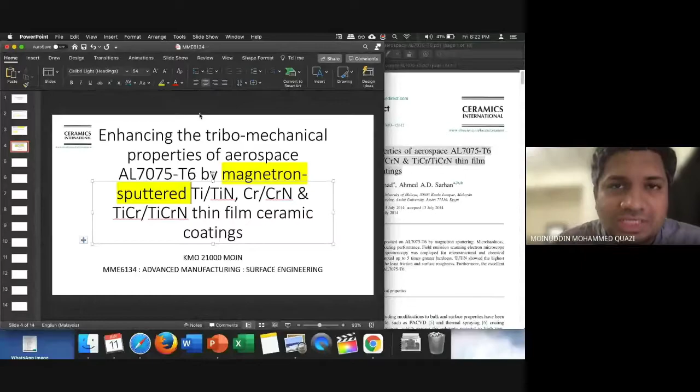Here you can see: enhancing the tribomechanical properties of AA7075 by magnetron sputtering. This is basically a surface coating process. AA7075 is the base material. This is the coating — TiN, CrN, titanium nitride, chromium nitride.

And titanium chromium nitride are basically coatings. So we have base material AA7075, and we have magnetron sputtering, which is the coating technique. I'm going to upload a coating technique presentation or video for you guys also. Then we have types of coatings. So the first thing you do after writing the title is give a brief overview of the coating technique.

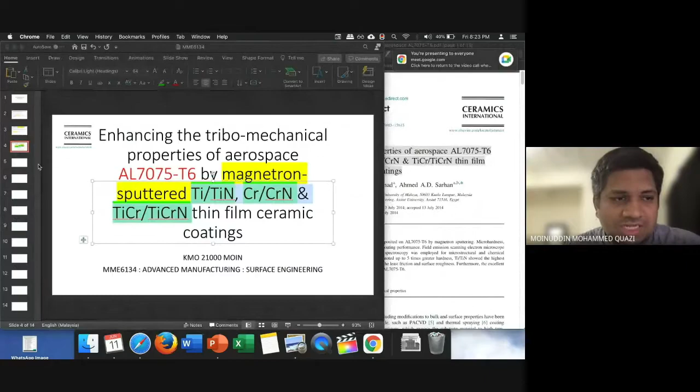So slide number 2 is going to be a brief overview of PVD, which is physical vapor deposition.

This will be your slide number 2. You have to give some process overview — what are the characteristics of the PVD technique. Target material is sputtered onto the substrate. Add some basic process description, and then add a picture of the machine. If you don't have the picture inside the paper, go online, search images, and try to get a PVD schematic, which will give you an overview.

This looks like a very nice schematic. So copy this image, paste it here. This is good, and then copy the link or copy the reference, and put it as a figure label. The figure label is very important. This is the reference — what is this all about?

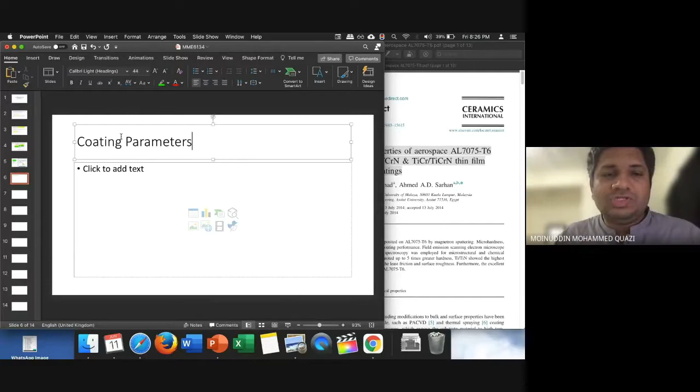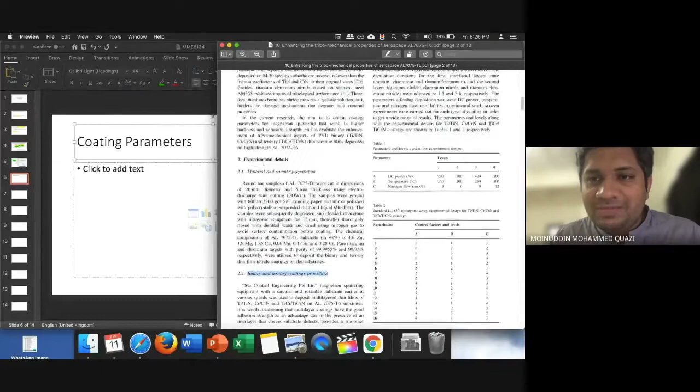Coating parameters — you can go here in the research paper, go to the methodology, and here it has shown the coating procedure and the parameters that they have changed. So these are the parameters they have changed.

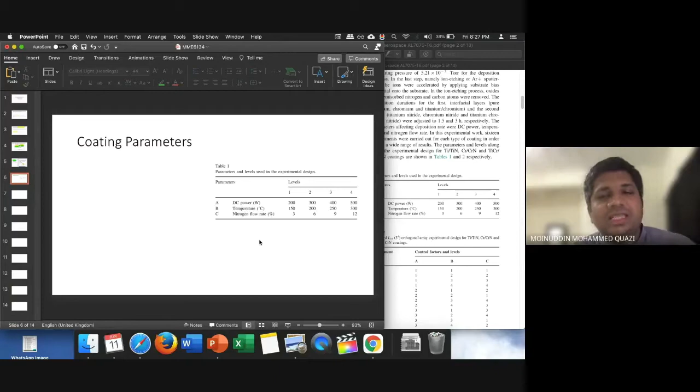The parameters that they have changed are DC power, direct current power, temperature, and nitrogen flow rate. So here you're now telling me these are the parameters for the coating process that they've changed in this research — that's good enough. What are the other parameters? Like the deposition chamber has a parameter of pressure. So use this too.

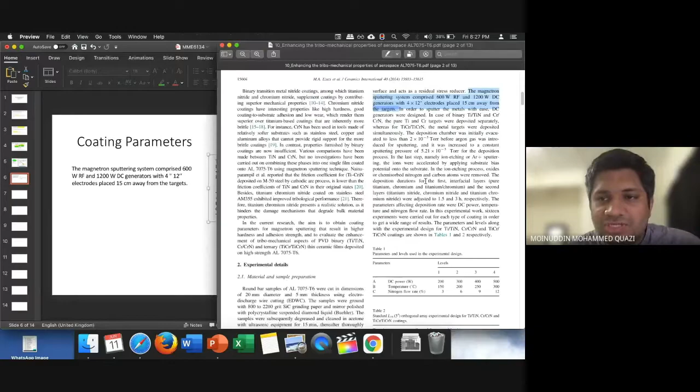Then they've got the power requirement also written, so you can add power requirement as well — add the parameters of this machine. You guys should know which parameters are required for which machine. For example, for anodizing process, I will not use 600 watt of radio frequency power — that's only for the magnetron sputtering machine. Electrodes are used in both anodizing and PVD physical vapor deposition machines. So these are some of the parameters you have to mention.

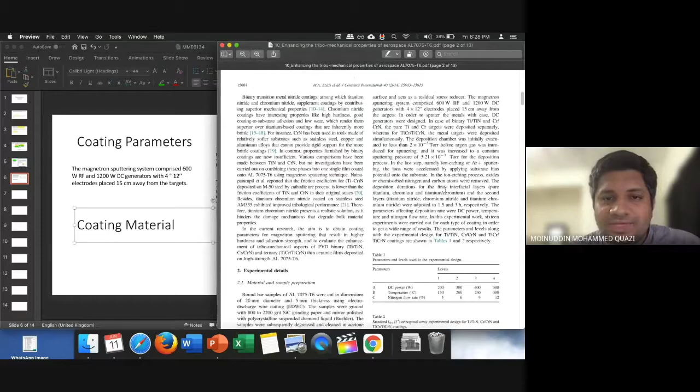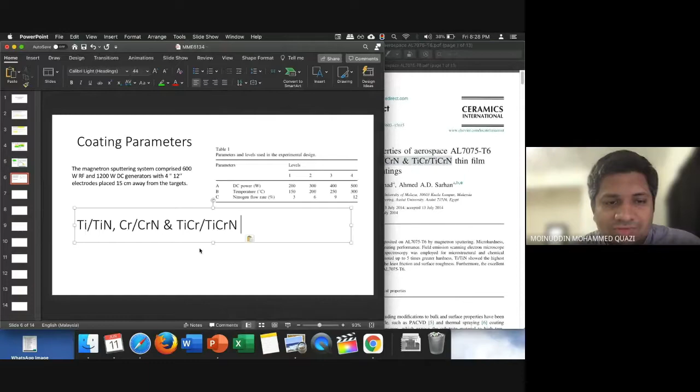After writing the coating parameters, you should write the type of coating or coating material. In my case, I have three types of coatings. Number one they've mentioned is titanium nitride, chromium nitride, and titanium chromium nitride — three different types of material.

If in the paper the coating is the same but the composition is changing, then you have to write the composition here. For example, this one is 30%, this one is 60% graphite added, and this one is 0.01% nanoparticle cerium oxide added. You have to mention, based on the research paper, whether the material type is changing or the composition is changing. In this paper, the type of material is changing, not the composition.

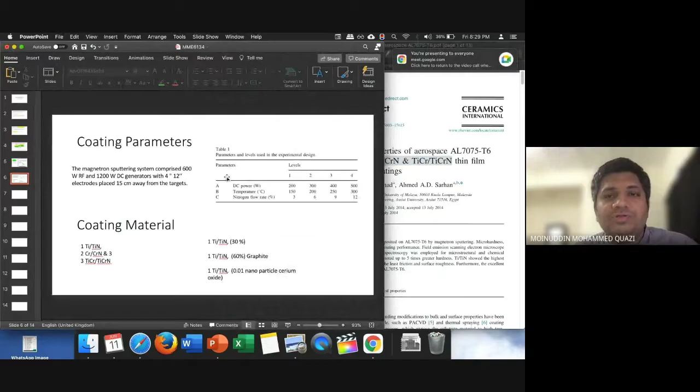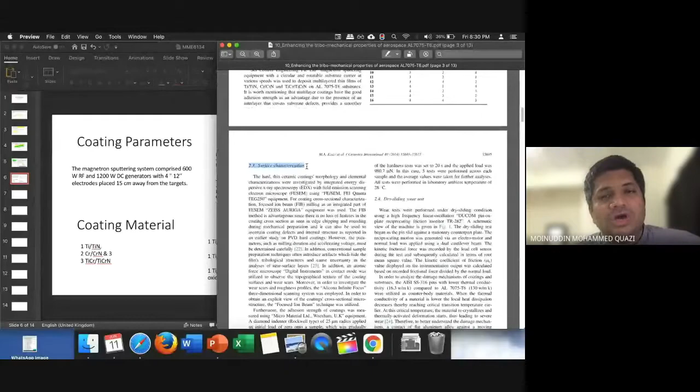So after going through coating parameters and coating materials, now you have to mention the measurement — what properties, what surface properties are they measuring? Here in this paper it's written surface characterization, so you have to write how the surface was characterized. In this you write surface or properties measurement.

Here they have written that they used SEM, scanning electron microscopy, then they have used focus ion beam technology.

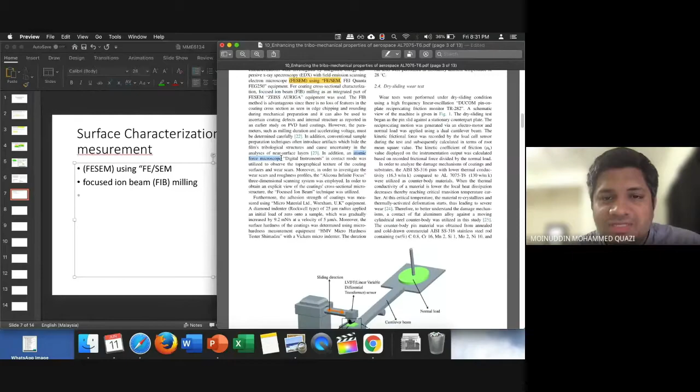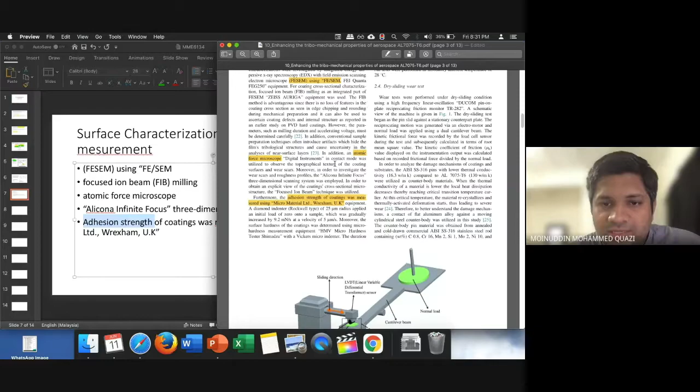Then they have used atomic force microscopy. This is something that you will learn in today's class slides. Then they have used the Alicona 3D scanning system. And then they have used an adhesion strength measurement system, which is something I will maybe upload tomorrow.

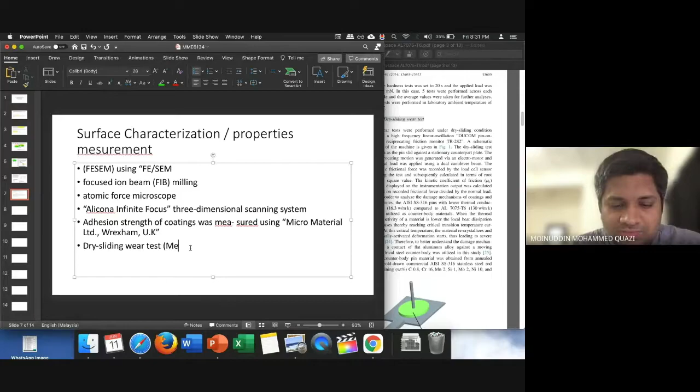And then this is what they have used for surface characterization. They also performed dry sliding wear testing to measure friction and wear. So friction and wear is also a surface property.

There are three main types of surface properties. Number one is surface roughness, surface topography, surface integrity. Number two is friction coefficient and wear. Number three is basically the adhesion or adhesion strength of the coating.

So do remember that we have to cover three properties. Number one is surface topography or roughness.

Number two is tribology, which is the field of science that relates to friction coefficient. And wear is basically a process by which, when two materials move together, the material is removed—some part of it is eroded or removed due to the rubbing action. So this is called wear.

So adhesion strength means that if I put a coating on my substrate, then how difficult it is to peel it off, or to remove it away from the substrate, or to scratch it away from the substrate. The better the adhesion between the coating and the substrate, the better the coating.

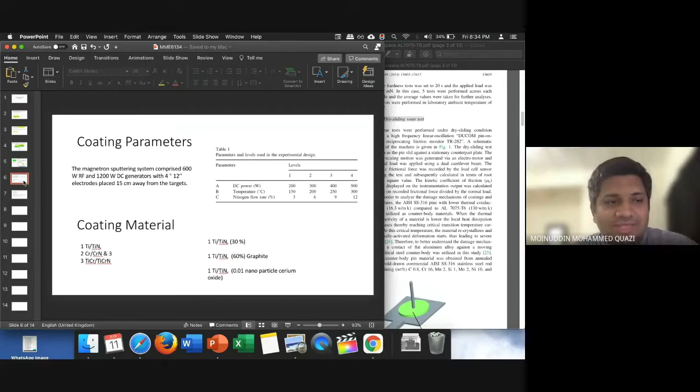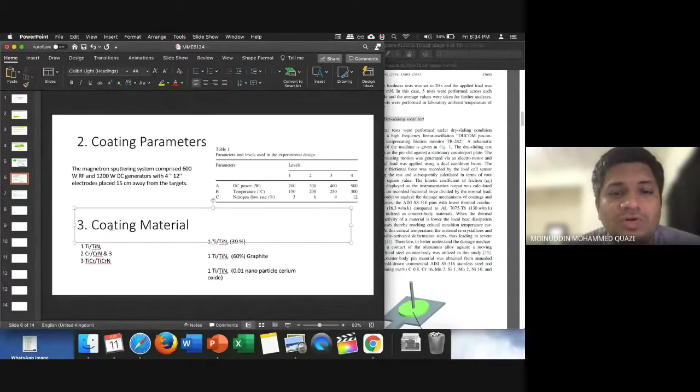So these are some of the three things you have to look for in your papers. Number one is the title slide, number two is the process brief description, number three is the coating parameters used, and then which coating materials are used, and then what properties and what kind of machines or measurement techniques have been used.

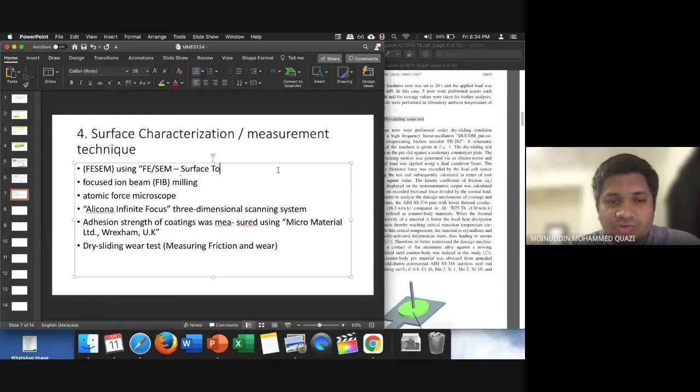So FESEM has been used to see surface topography—this is something you should know, or can learn today. Then focused ion beam milling is used to see the surface cross section.

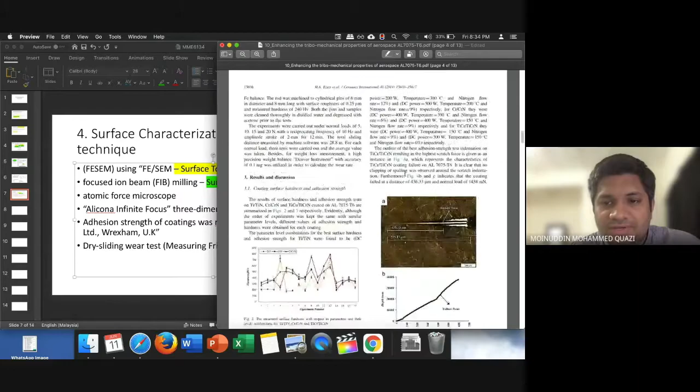So if you go here in this paper and look at this image, this is a focused ion beam milled image. What happened here is that I have a coating deposited on a substrate. Using focused ion milling, I have removed some part of the coating using ions, and now I can see the depth part of the coating shown in this figure.

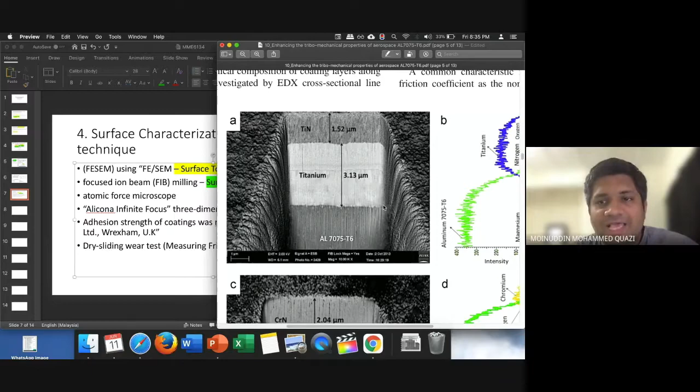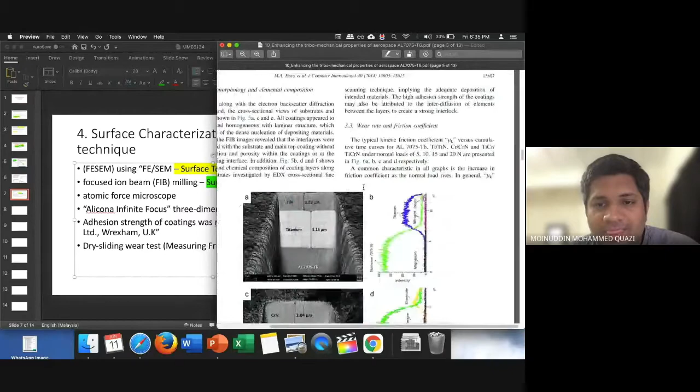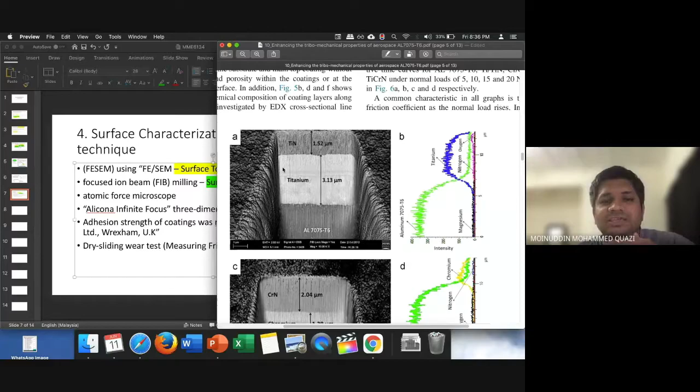Here you can see we have the substrate, which is aluminum 7075, as shown in the title. Then we have a titanium nitride coating. If you look at the paper, in figure A we have the Al7075 substrate, then one coating of titanium, and then another coating of titanium nitride. This is a focused ion beam milling scanning electron microscopy image, and it gives us the surface cross-sectional information.

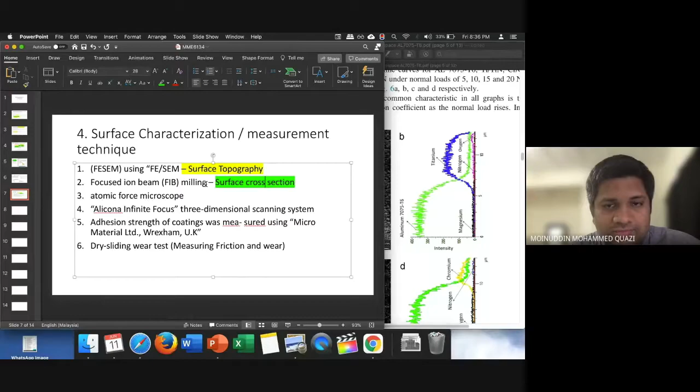Okay, so let's move down to atomic force microscopy. Just search atomic force microscopy.

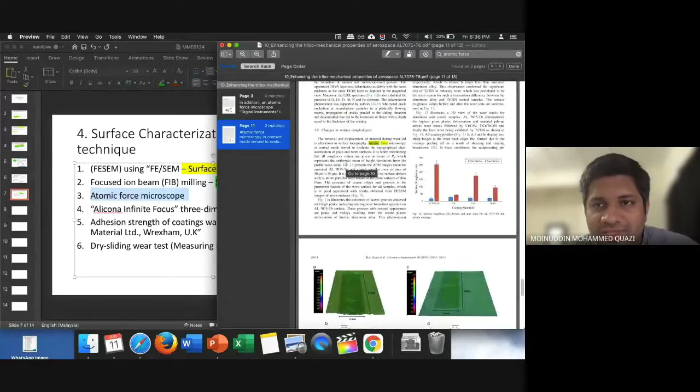And here we go, atomic force microscopy, page 11. So click page 11 here, and you will find atomic force microscopy images.

Atomic force microscopy, as the name suggests, is atom-based microscopy. In this microscopy, you have a coating and a very small 10 nanometer stylus or tip that scans slowly and makes the image you see on the screen. It scans a very small area. In this figure, the area is 30 microns by 30 microns, and you can see the surface texture.

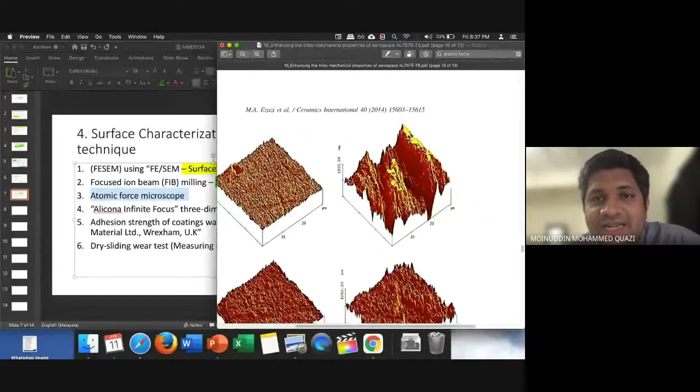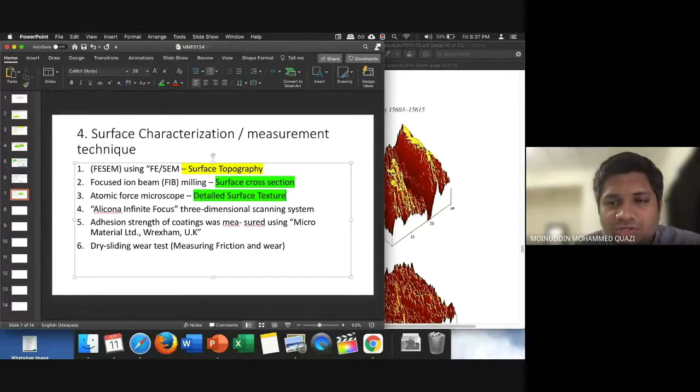With atomic force microscopy, I can see detailed surface texture. You can also see what atomic force microscopy has been used for. In addition, atomic force microscopy in contact mode was used to observe topographical texture, so you can also write this here: to observe topographic texture.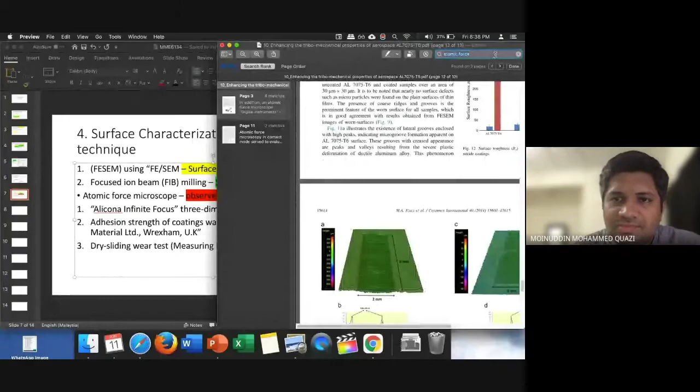So, scanning electron microscopy. What is scanning electron microscopy? Here you can see in one of the images, this is a scanning electron microscopy, I think this is Zeiss, Carl Zeiss SEM. Let me make another one, SEM. So scanning electron microscopy is shown here in this figure, and it is also used to see surface topography and cross section.

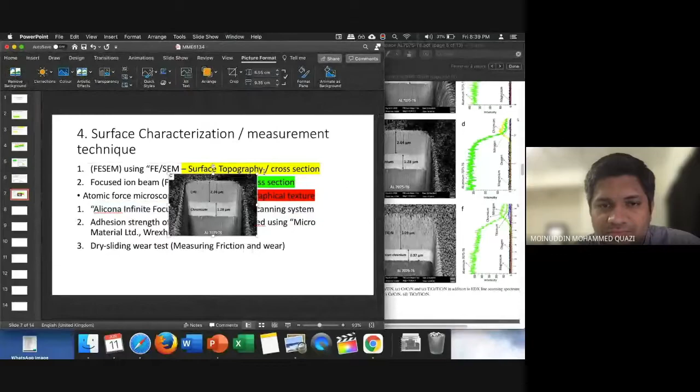Now, what is this three-dimensional scanning system, and what is its function? Let me add scanning electron microscopy here so I know what it is. I'll give this to you guys so it's helpful. Focus ion beam, this is also focus ion beam milling. I think this is focus ion beam milling. Scanning electron microscopy is this one as well.

Right here, this is SEM, this is focus ion beam milling. Next, we move to atomic force microscopy, so this is atomic force microscopy. Then we have a three-dimensional scanning system.

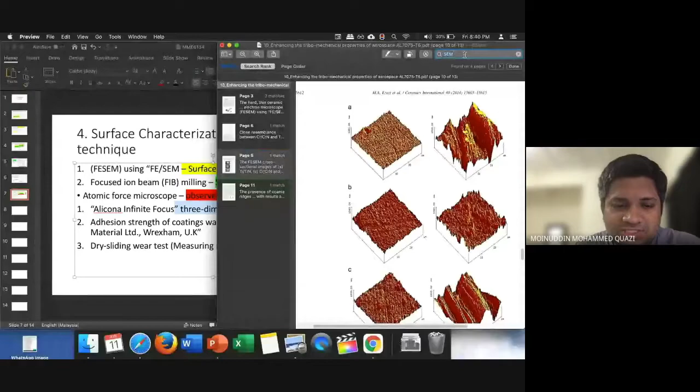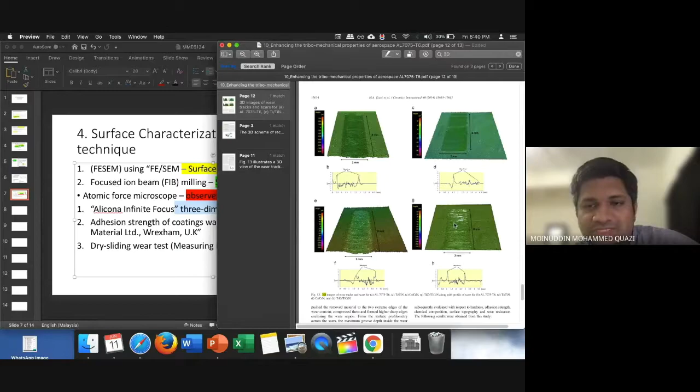Three-dimensional scanning system. Let's search 3D. When I search 3D, you can see 3 or 4 images. This is the image of the substrate, aluminum 7075. This is the image of titanium nitride coating, this is chromium nitride coating, and this is titanium chromium nitride coating. So this is basically an example of a 3D scan image.

Here you can see that a 3D scan has been carried out, and the surface profile or surface measurement has been taken as well. Just copy this so you guys know what a 3D surface scan is.

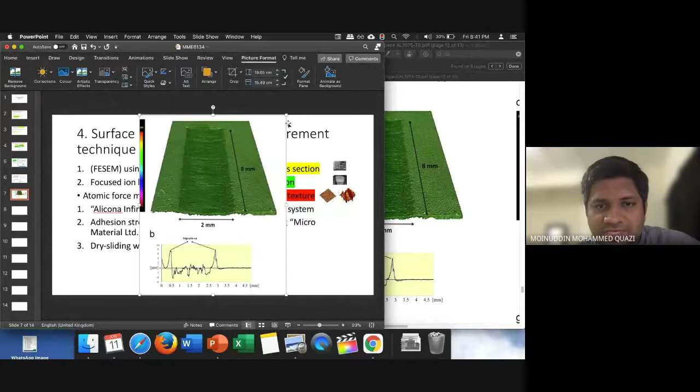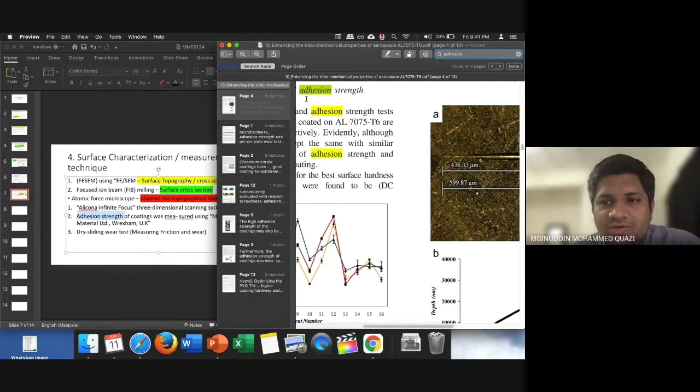Next is adhesion strength. I am going to search adhesion. So when I go to adhesion, I see this image. Adhesion strength, in this adhesion strength image, I have optical microscopy.

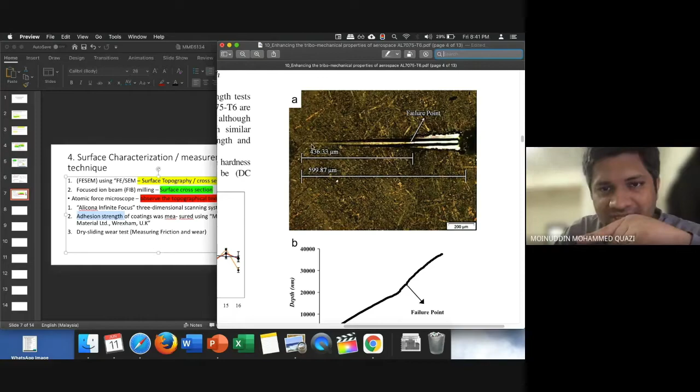What is adhesion strength testing? It is a test where you have the substrate, I put my coating, then a diamond indenter goes and starts scratching very hard, trying to pull the coating out. Here you can see the diamond indenter trying to pull the coating out, scratching until you see the substrate in this portion. So scratch testing is a process in which you scratch the coating and get a value called critical load, the load at which the coating fails.

So this is the scratch testing microscope result. I'm going to put scratch testing here. I'm putting these things so that whenever you guys read your papers, it's easier for you to know and understand what you are looking for.

Somebody came. Nobody's here.

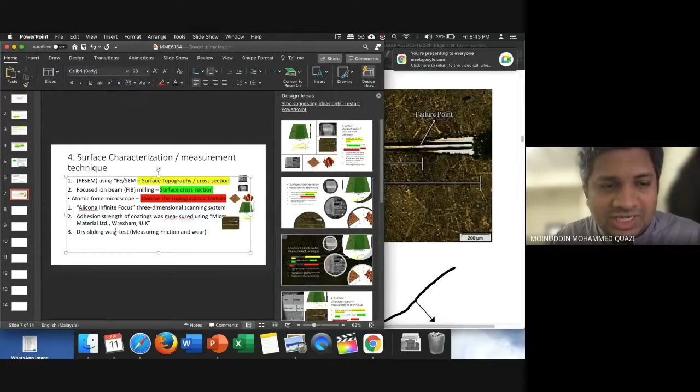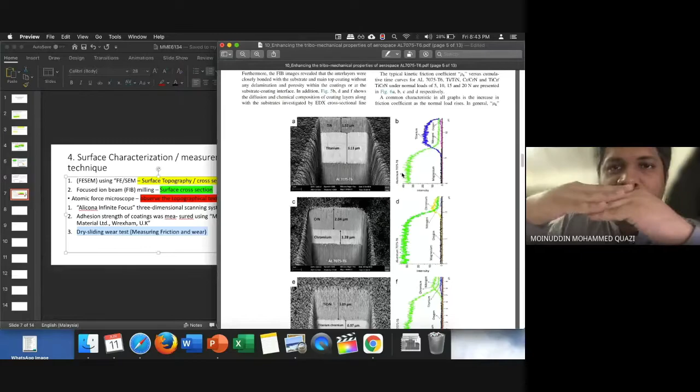So adhesion testing, then the last thing is dry sliding wear test. You search wear testing. Wear testing is a process where I have my sample and I quickly rub the material, scratch and rub it. This way I know how much wear took place, how much material is removed from the coating. For wear testing, they have shown this machine.

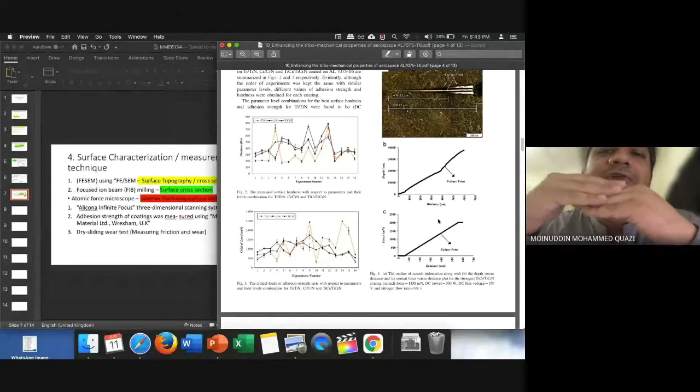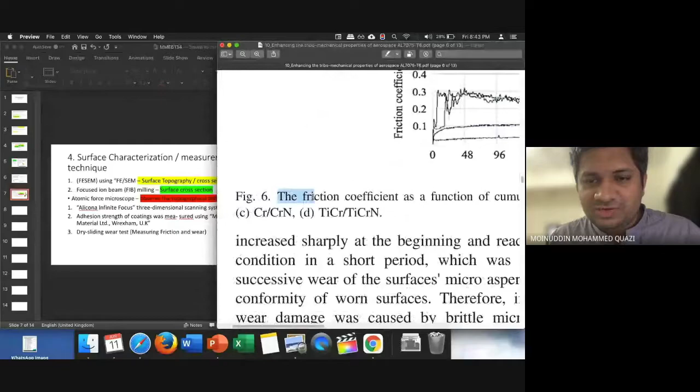So I will put this machine here, or I can put the results of wear testing. In wear testing, you get the value of friction coefficient and amount of wear. So the friction coefficient is here, shown as a function of cumulative sliding distance, for substrate, coating number 1, coating number 2, and coating number 3.

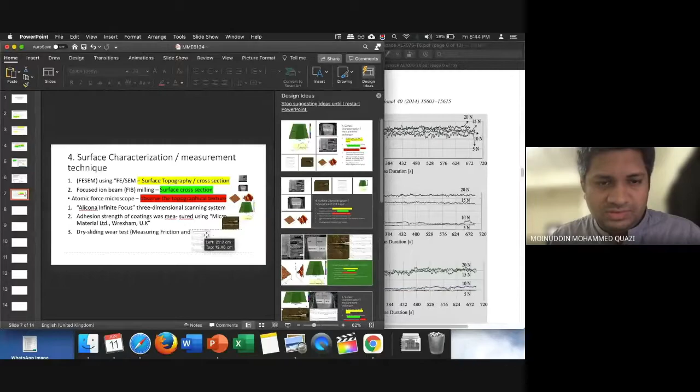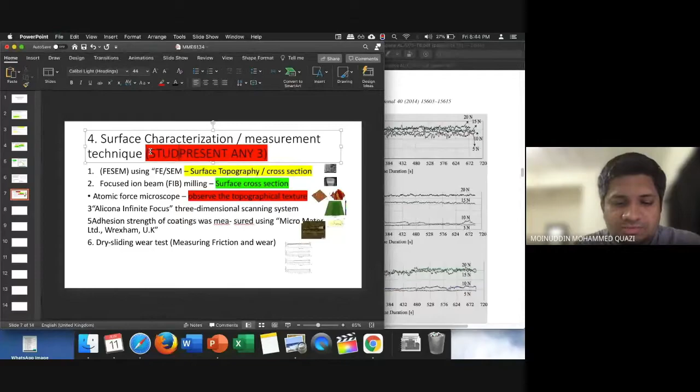So your fourth slide is what you are going to measure, or what has been measured in this paper regarding surface engineering. These are the 6 things which I've highlighted. In all papers you will not get all 6, so I want you guys to present only 3. Present any of them, it's up to you guys what you want to present. Students can present any 3 properties.

So slide number 1, title. Slide number 2, overview. Slide number 3, coating parameters and materials. Slide number 4, what you are measuring. Now that you know what you are measuring, you will write your result, what you have measured. So now it's time for results: slide 1, 2, 3, 4, 5, 6, 7. This is property number 1, property number 2, property number 3. Then you have the end.

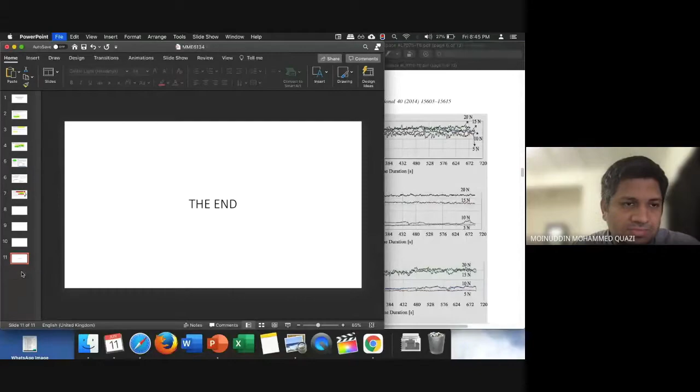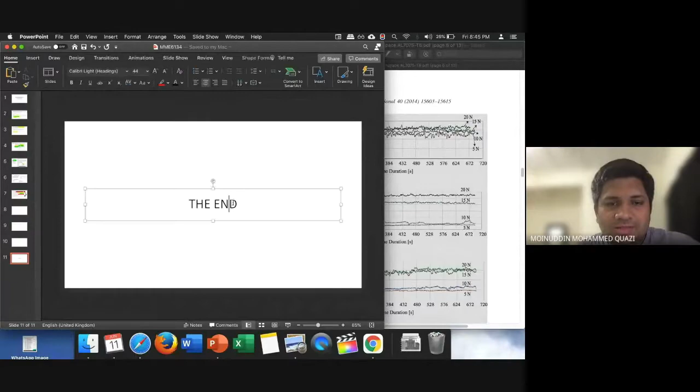So total 1, 2, 3, 4, 5, 6, 7. 7 slides in 10 minutes. Actually, the title slide does not require time. So you have 10 minutes to present, 10 minutes to present 6 slides. 1, 2, 3, 4, 5, 6. So you guys have 6 slides.

In 10 minutes. So the reason for this exercise and for reading this journal exercise is for you guys to first go through my lecture and then correlate what you have learned through the practical that people have done already. That is my objective. And then whatever you observe, whatever you catch from the papers, you catch and then you present to us. In this way, I will be also correcting you guys in the presentation, and then at least you guys will have a good chance to learn from what you have seen. If you read yourself and then you ask something, then you will learn more. If I teach you something based on some narrative, then you will not learn much.

So we have to present 3 properties. In this example, I will present 3 properties. Property number 1 I want to present is surface roughness and texture. So where is this information? This information is here.

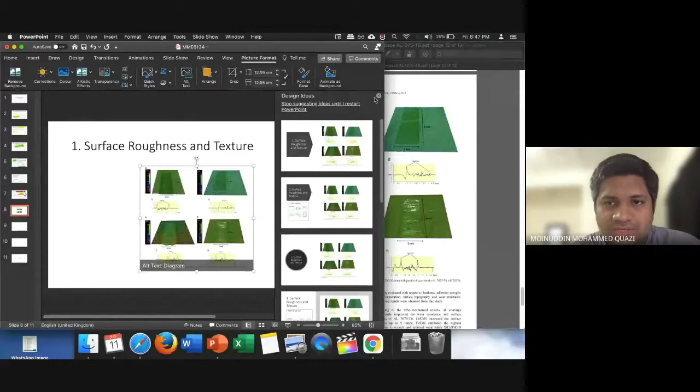So this is the surface roughness. So I will put it here. And this is the surface roughness figure also, base material, coating material, all 3 of them. So I will use that.

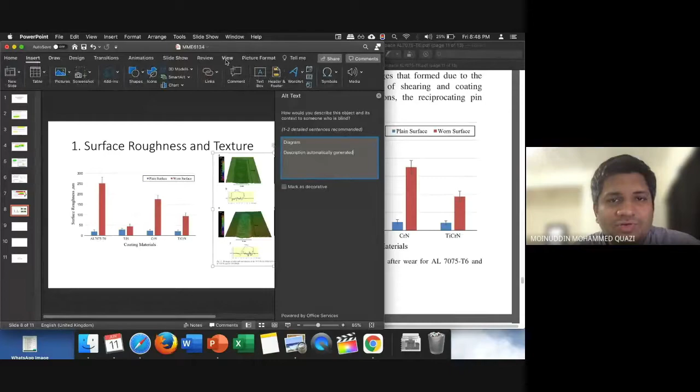So my objective will be to describe these two figures. Just write one or two lines. Also, you can write one or two lines, concluding lines. Write one or two results line.

What happened after we do wear testing? After we do wear testing, because our aluminum has not been coated, so it undergoes a lot of damage. When it undergoes a lot of damage, then the surface roughness increases too much. So that is why the change in surface roughness for aluminum is too high. So this is something that you have to read from the paper and explain about this. So this is property number one, surface roughness.

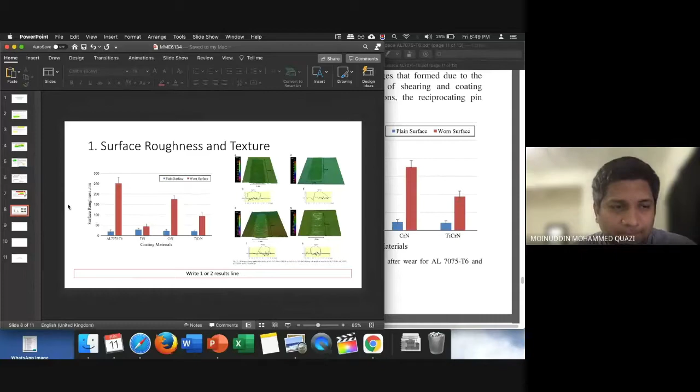Let's move to property number two, adhesion strength. How strong my coating is sticking to the substrate. So I will go and I will add the data of adhesion strength. The adhesion strength data is here.

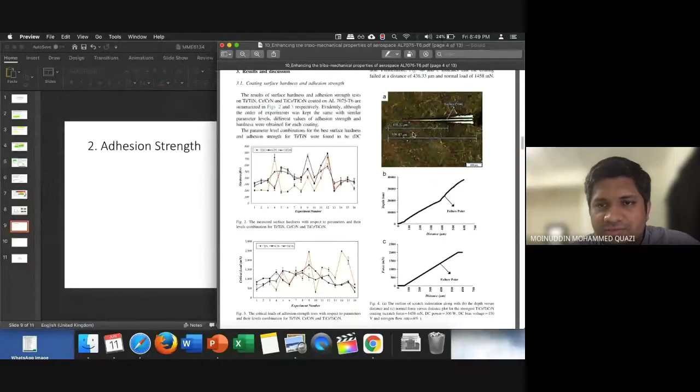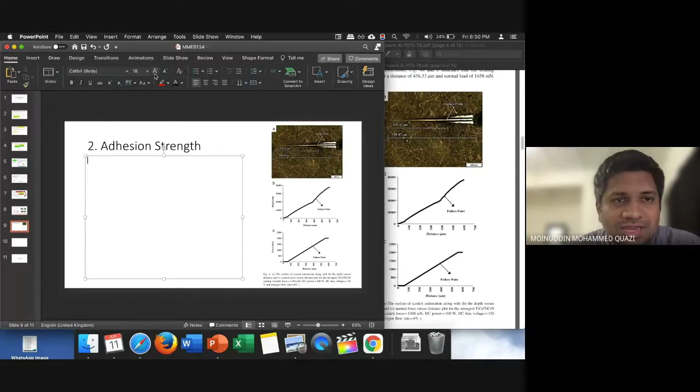I will put it here. Adhesion strength data. So you are going to describe here what do you see or what do you observe from the adhesion strength. So based on the adhesion strength, let me give you a highlight or overview that you are going to see in adhesion strength.

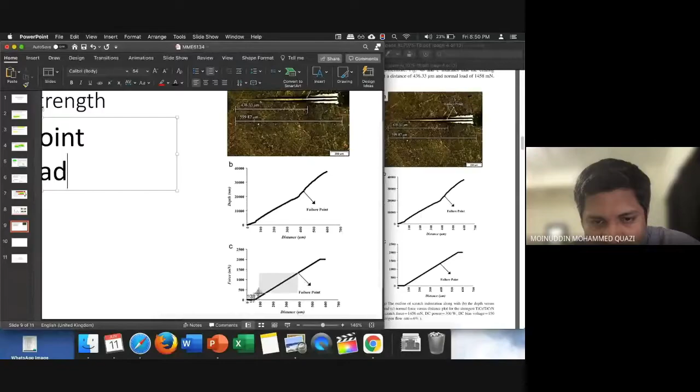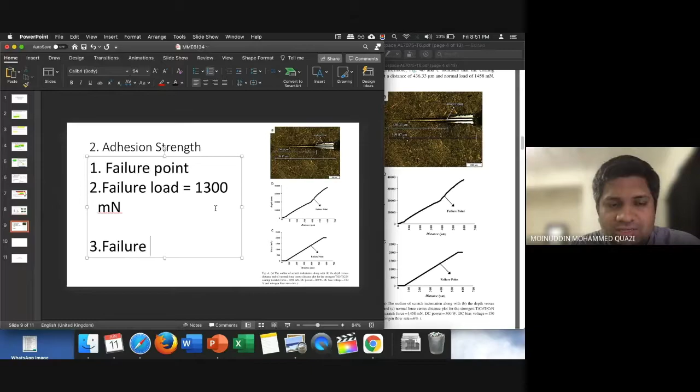Number one, failure point. Number two, failure load. As you can see in the figure, the failure load is about 1300. It should be mentioned also. So failure load was equal to 1300 millinewton.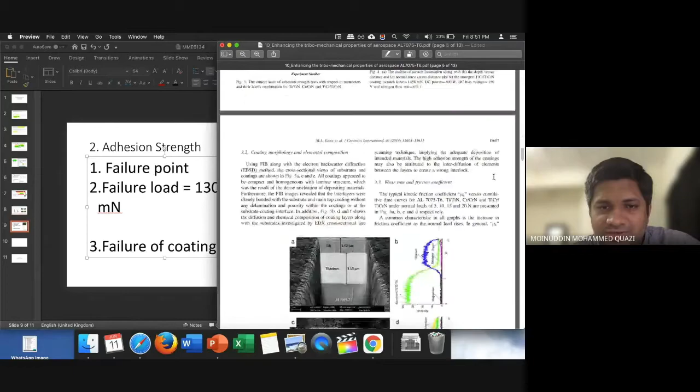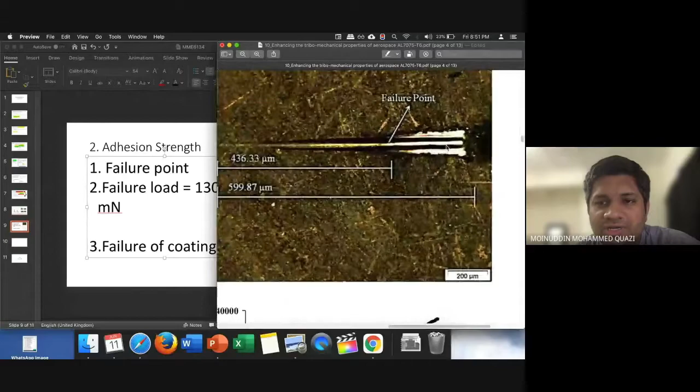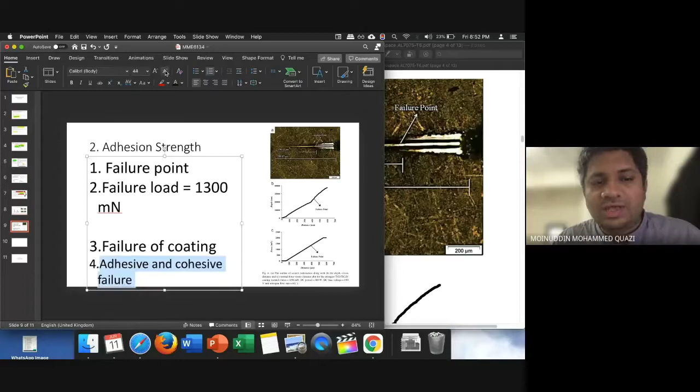So if failure data is not available, then you cannot write anything about failure. But here you can see that the failure point occurred at 436.33 µm, here when the substrate is exposed. This is the coating part you can see, and here is the part where substrate has been exposed. It means coating is fully finished, gone already. So there are two types of failure: one is adhesive and cohesive failure. So if the article is mentioned, then mention about failure, otherwise mention about some other characteristics.

So property number one, surface roughness. Property number two, surface adhesion. Property number three is tribology, friction or wear. So you can put friction coefficient graph.

Search friction coefficient. This is the friction coefficient graph. So copy this, paste it. Put the label also.

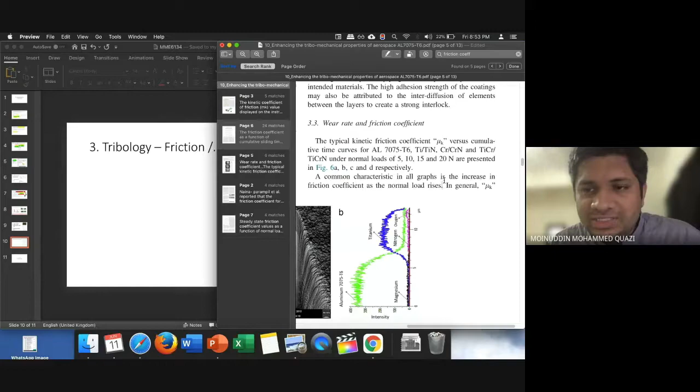And then you have to define the friction characteristics. Here the friction characteristics are written, variated friction coefficient. So the typical kinetic friction coefficient are given for these materials. A common characteristic in all graphs is increase in friction coefficient as the load increases. So very easy thing, as the load increases, friction coefficient increases. So this is a very important point. Next, what happens between coating?

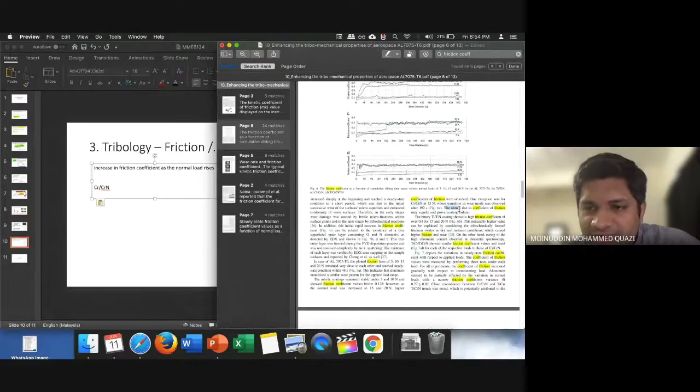So for chromium nitride, it's written here that an abrupt rise in friction coefficient may signify and prove coating failure. As you can see from the graph, that abrupt rise shows maybe the coating has already failed. So these are some of the characteristics that you have to write and define.

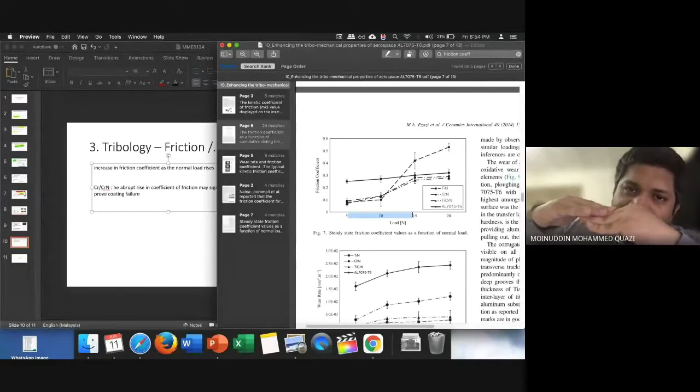Here is another friction coefficient graph, with respect to load. So basically this is my substrate, and this is my friction coefficient testing equipment. How much load is it going to put before doing the rubbing? Is it slow and smooth, or am I going to put a lot of load during the friction coefficient testing? This is defined as friction coefficient versus load, so here you will see the friction coefficient versus load diagram.

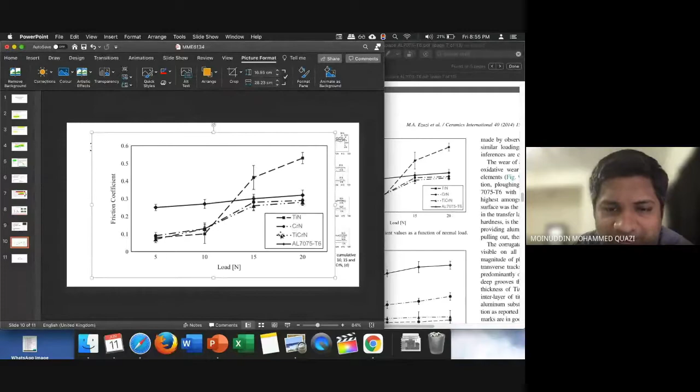Here you can see that you've got 3 coatings and 1 substrate. For the substrate, the friction coefficient is high; for titanium nitride coating, it is very high. For chromium nitride, it is one of the lowest, and for titanium chromium nitride, it is the least. So these are some important data that you can recover from the table. That's it, no need to do any conclusion.

So this is the end of your slides. Maybe you can write here just 'the end' and one conclusion from the paper, a one line conclusion.

So this is the concept of the presentation, very simple. First, extract the surface engineering related data, put it in the presentation, then see what properties are measured, analyze the properties which are measured, and then write or speak them during the presentation with the help and aid of figures. So this is something I have covered.

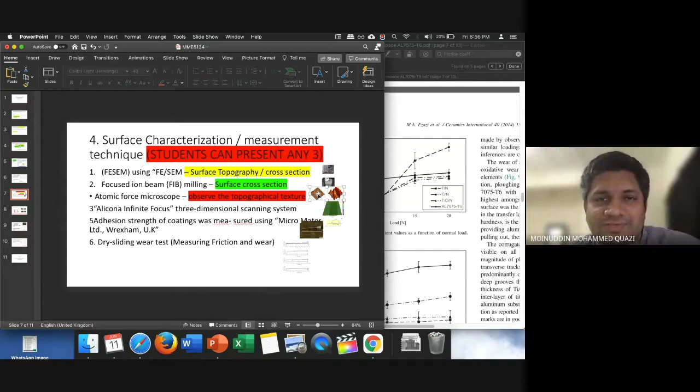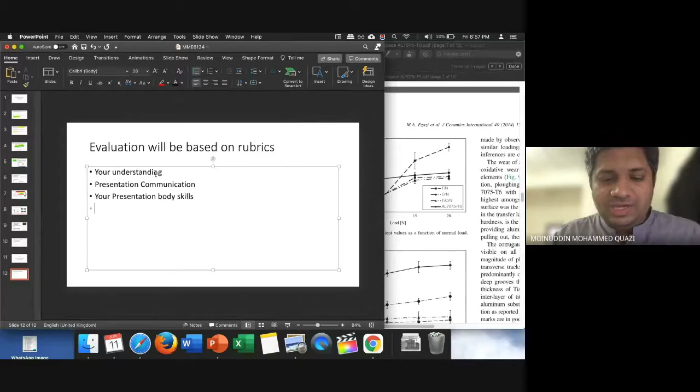I'm going to add these guidelines for what I'm going to evaluate during the presentation. Evaluation will be based on rubrics. It will show your understanding, so I'm going to evaluate your understanding, presentation, communication - whether you are speaking English, not even my English is correct or fluent, but at least your communication should be quite nice. Then your presentation body skills, then the content of the presentation, then your depth of understanding of surface properties and coatings.

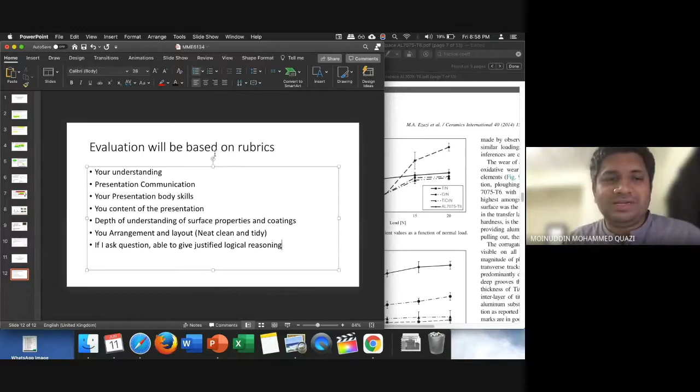And last but not least, your arrangement and layout based on the layout that I have given - it should be neat, clean, and tidy. And if I ask questions, you should be able to give justified, logical reasoning. So these are some things that I will be evaluating for you guys from the presentation.